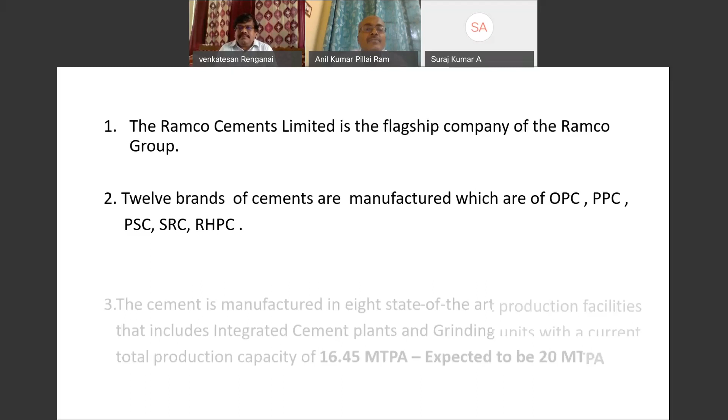What is the grade of concrete? What is the slump required? Which type of chemical admixture is being used, if at all? And how far is the batching plant or the concrete mixing from the place of delivery, so that slump retention and all can be planned. Based on that, different types of cement are there, and our present capacity is 16.5 million tons.

This is expected to be 20 million tons per annum because we have our expansion going on. One plant is coming up in Kurnool district, a greenfield integrated cement plant, and we have a grinding unit coming up again in Odisha. With those expansions, our capacity is going to increase to 20 million tons per annum.

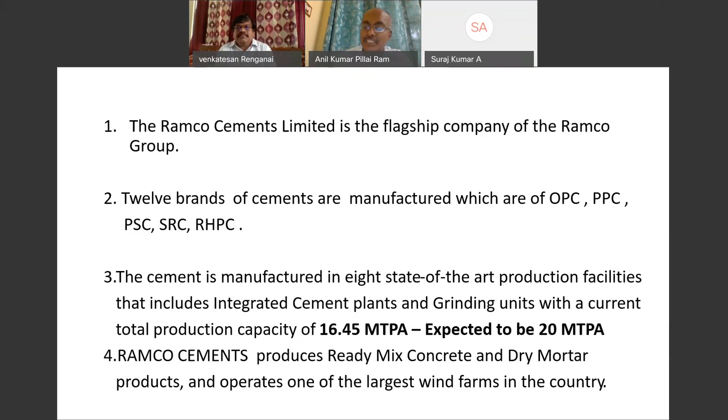Apart from ready mix concrete and dry mortar plant, we also operate one of the largest wind farms in the country, because renewable and non-renewable sources of energy become very important. We need to use more renewable energy, and that is where our initiatives in the area of wind farms play a vital role.

Major projects can go in for that, and we have this Infra 53 grade cement specifically for projects that want a longer slump retention time. So within ordinary Portland cement, we have this degree of customization. We also have a special type of cement, Ramco Super Fast, which is specifically meant for precast applications.

Precast items are being used in huge quantities nowadays in construction work, whether it is a solid block, hollow block, paving block, or for that matter, the superstructure of some infrastructure like bridges, also made using precast. That is where Ramco Superfast cement plays a vital role.

Then we have the most widely used cement across the country, the Portland Pozzolana cement. Various types of Portland Pozzolana cement are there—you have the Ramco Super Grade, which is a PPC, and Ramco Super Crete, which is specifically meant for concreting application.

As all of us know, PPC cement is specifically recommended from the perspective of low heat of hydration, low lime leaching, and higher durability in concrete. Because of those advantages, we have this blended cement, and we have Portland slag cement, which is again as per IS 455, and we have sulfate resisting Portland cement.

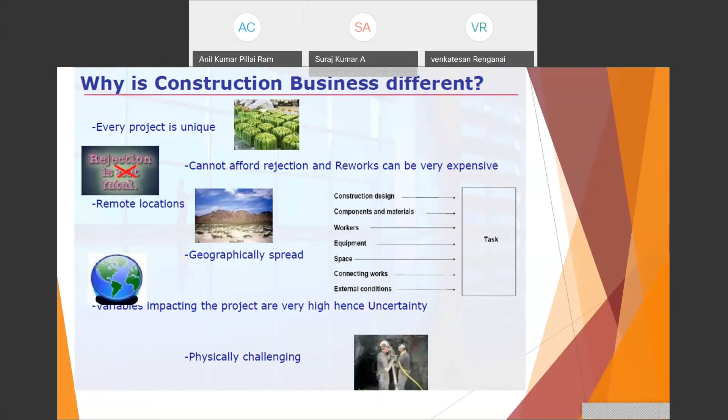As Anil sir told, there is low productivity. Day by day we are seeing in the construction industry the productivity is dwindling, and despite bringing machineries, our construction industry productivity is lower than any other industry. There are a lot of safety issues too, especially when our infrastructure projects are at very high altitude, and even with multi-story buildings nowadays, there are a lot of safety issues.

The most important one we are going to see now is the waste of materials and resources - what are the things that cause the project a lot of problems. Along with that, we see issues with stores management, sub-vendor coordination, and customer interface.

One of the most important things I am seeing here is external factors. Even the introduction of GST, demonetization, and now COVID-19 - everything is bringing a lot of problems to our construction industry.

Now people are suffering like anything, because many times we use migrant labor. Now everybody has gone. Whenever I contact my friends, they tell me getting back the people is very difficult. So now it's time to think how to retain them - what is required to retain our workforce, even our engineers - because we are facing a very big challenge. How do we overcome this is a time for us to think on.

So one of the things I feel personally is lean - let us see how it will help. If you go through some of the details, we can understand how lean is going to help us.

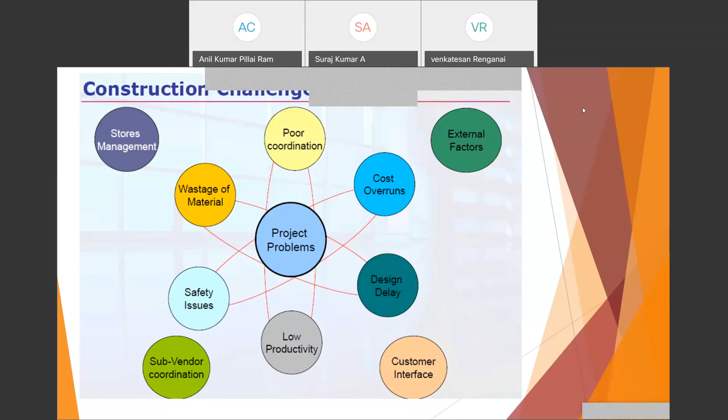Coming to the lean definition, from lean manufacturing or lean production, simply lean is a systematic method for elimination of waste within the manufacturing or production system. We have to identify waste - waste being the non-value adding things. We have to identify them and eliminate them. So it involves improving the production process with minimum cost and maximum value.

What is the advantage of it? By eliminating waste, naturally our cost goes down. On the other side, we have to identify what value is required, considering the customer needs, and based upon that we have to proceed.

Now what we are seeing with our mobile applications and mobile phones - a lot of value additions are happening and the prices are coming down. The same way we see with many products, even take the car - now we see a lot of digital things included there. So value additions are happening everywhere, even including our construction activity.

Coming to lean construction, it's a combination of operational research and practical development in design and construction. It starts from design and covers the entire project life cycle. Construction with the adoption of lean manufacturing will take many things from lean manufacturing principles and practices into the end-to-end design and construction process.

Everywhere we are checking what things we can implement to add value. So we are also trying to minimize cost and maximize value by identifying customer needs through our construction activities and processes.

Unlike manufacturing, construction is a project-based production process. As I already told, it is a unique thing with a different project, so we have to customize every time according to our present project. It is again production where we make various things, but it is based upon the process - we have to identify the processes and improve them.

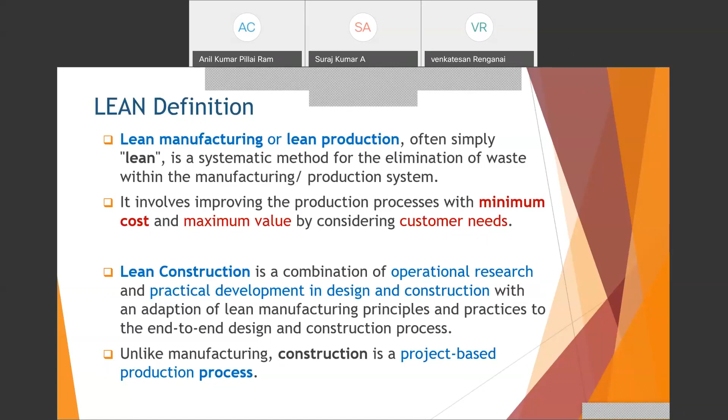So if you see the history of lean, it started in 1890 in Europe. Then subsequently it went to craft production, even making yachts and all. Then later on they went with mass production. Especially Henry Ford, he started the production line, the assembly line concept, in which he started minimizing the time, maximizing the process and all those things.

So parallelly, the Toyota, when they started manufacturing the car, they were in a very big trouble to compete with the US market. So they were thinking how to make it. So Taiichi Ohno, one of the chief engineers with Toyota, as well as the people in Toyota, they started making this Toyota Production System, wherein they started identifying the process and how to improve the process, eliminate the unwanted things in the process, including the just-in-time concept of bringing the material on required time and all like that.

The Toyota Production System, subsequently, when it went to other parts of the world, it slowly got coined into lean thinking, especially with a book called The Machine That Changed the World, written by James Womack as well as Daniel Jones. They brought the concept of lean thinking. So here again, they emphasized how to reduce the waste and all.

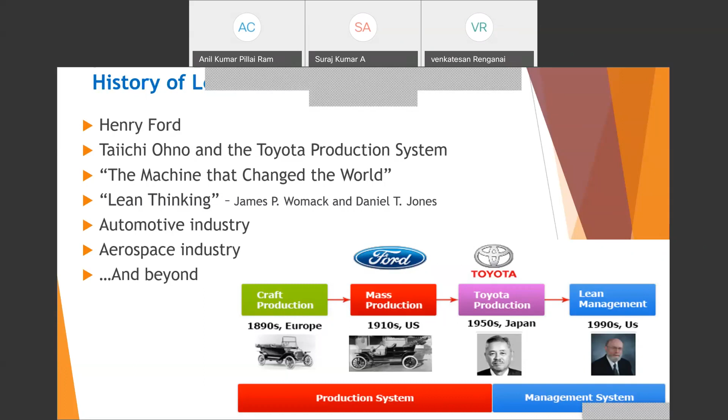Before going further, we will see a very interesting phenomenon. A Construction Industry Institute publication from 2004 conducted a study with application of lean principles in construction that reports 75% to 90% of field work is non-value added. What do you mean by non-value added? It means where we will not get the payment simply. In the non-value added, there are two things: one is non-value added essential, that is required to make.

In our construction industry, if you want to make brickwork, I need to make some formwork and all. That is the non-value added essential. There are many non-value added non-essential things also, like bringing the material, stocking at that place, later shifting that from one place to another. Many things we do are non-value added non-essential. So if you compare the value added with the waste, that is non-value added, in order to do that 5 to 15% value addition, we have to do 85 to 95% of the non-value added, that is waste. So there are various waste things there.

We will be discussing about that a little later, but it's a fact that you can check if you want. Even we checked with some sites, we went and verified. So it is very sad to say, but there are many non-value added things there. There are some essential things there. Now it is time for us to identify the non-essential things, and we have to remove those things, by which it will bring down the cost and increase the efficiency. It will save time and all, because everything involves cost and time.

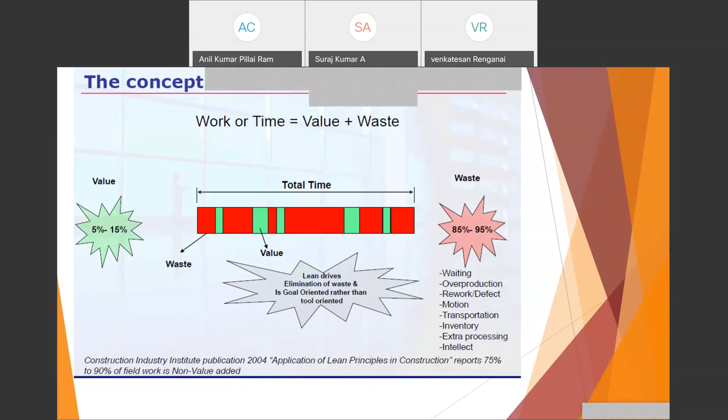So now we have to see the necessity of lean. Competition is there everywhere, worldwide competition has started and it is growing. People are competing. Now Indian industry, many people thought they were very comfortable. Now we are seeing foreign participants coming inside. Similarly, our people are going and taking some foreign contracts. So companies that meet customer needs and are more efficient than their competitors only will survive.

Please understand, now the problem is more than growth, now the problem is survival itself. I think all of you will agree. Today most of the construction companies are in red because they are not in a position to meet customer needs, as well as they are not efficient compared to their competitors. So it is becoming very difficult for them to survive itself. So now it is necessary for them to adopt lean if at all they want to come out of all those things.

See, earlier you can have any color you want as long as it is black. That is what it indirectly means, that customer didn't have choice. It's a dead philosophy.

Initially, when Ford was making cars, they were making only cars with black color only, because black is cheap. So they thought, okay, we will make with black because the customer doesn't have any other choice.

Nowadays, we are seeing not only a change in color. Now we are seeing that a lot of things are brought into it. Many infotainment features were brought inside the cars and all. So we are seeing that everywhere, value addition is becoming the need of the day.

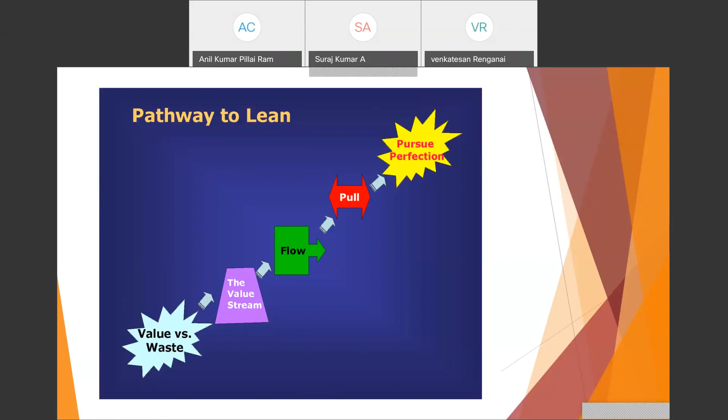We have to specify the value. Here the value can only be defined by the ultimate customer, what the customer wants. Earlier we could make and give something to the customer. Now the customer specifies. Even Mahatma Gandhi told that the customer is God. So we have to understand what is the need of the customer.

Value is only meaningful when expressed in terms of a specific product or service, which meets the customer needs at a specific price at a specific time. Now the price also they want very specific. Some things where they want economy, some things where they want luxury. So the price will vary.

Similarly, with time, people want it very urgently. So we have to go for making it very fast and delivering the things and all. So here, any process that the customer would be prepared to pay for adds value to the product. We have to identify here what the customer requires and is ready to pay for.

Value adding activities transform the product closer to what the customer actually wants. So understanding the customer need and requirement, if you go on adding value, that will make the product closer to what the customer actually wants, and increase customer satisfaction also. So primarily the lean concept emphasizes value, that is nothing but what the customer requires or wants. So we have to identify that one first.

Second important thing is the value stream. So here we have to identify and create that value stream. Value stream is nothing but the sequence of processes from raw material to the customer that create value. Here we have what are the actions currently required to bring the product from raw material into the arms of the customer. So the product will go under various processes.

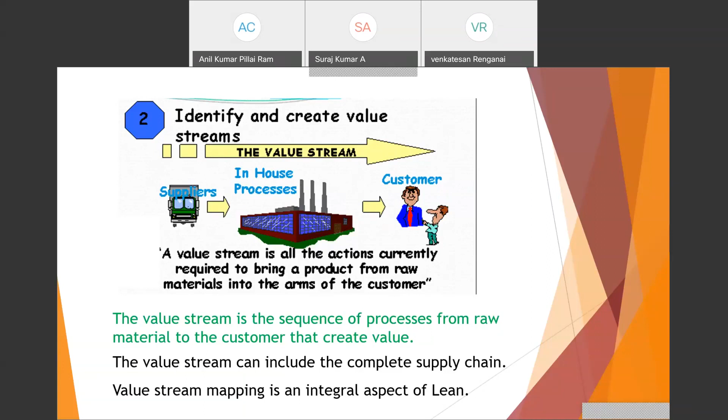The next one is flow. Here we have to make the value flow. The flow is between the processes, we have to identify what are the things that are required. So we have to identify and link all the activities and the process into the most efficient combination to maximize the content while minimizing the waste.

Here we have to understand what products should flow through the lean organization at the rate of the customer needs. We have to identify what is the rate at which they require. So we don't want to bring so many inventory and pile up the inventory as raw material or as finished products. We also have to identify what progress is required and how to combine them, by which we can eliminate many of the non-value adding items.

So here we have to add value more quickly. We have to identify how we will be making the flow by removing the obstacles and all. Later on we are going to see everywhere, when we are processing it, lot of constraints are there. How to identify the constraints and remove those constraints will come part and parcel of this flow concept.

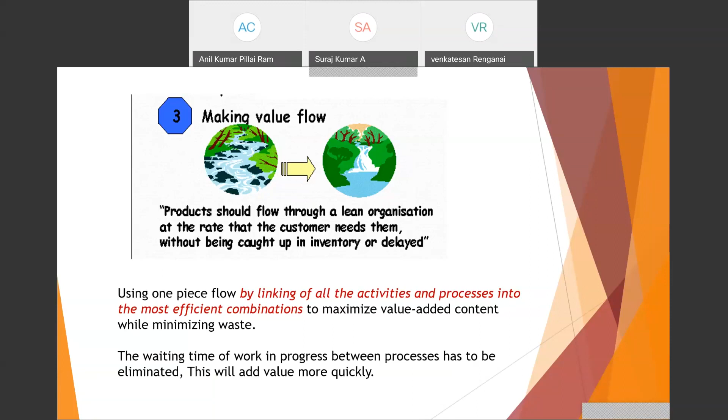The next concept is pull production, not push production. Normally what we are trying to do is we are going from the top down approach. Here we have to emphasize the bottom to top approach, that is the pull approach. The pull production means, whatever the customer's demand, accordingly we have to release the thing.

The customer has to pull the things from the various production people. Here we have to make the thing as required, pull the value according to the customer's demand. We have to identify what is the customer demand, and based upon that, we have to release the things. So we have to respond to the customer's rate of demand, the actual customer demand that derives the supply chain, so the entire supply chain we have to link according to the customer demand.

Based upon the supply chain view from downstream to upstream activities, we should not process the upstream supplier until the downstream customer signals a need. Even in our construction also, we see a lot of things are manufactured, that means we are producing, and a lot of things become oversupply, more than the demand, and we see a fall of the market. It may be flats, big cities and all. So every time we are going for push production rather than pull production.

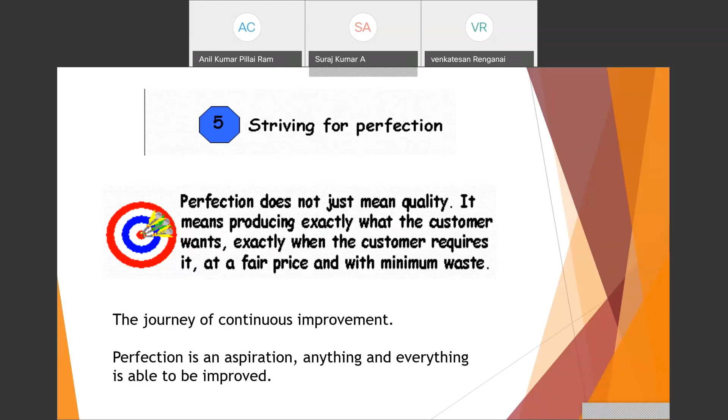For example, if I am doing brickwork, I can take the measurement and get the payment for that. At the same time, there are many activities involved in making this value-added activity happen that we cannot avoid, but we have to reduce it.

In lean, they explain this under Muda. It is a Japanese word for waste. There are 7 ways mainly they are identified, and it is very much relevant to us also.

Number 1 is overproduction. Here, whatever is required, more than the demand, we will be going on making it. Even at the site, you can see a fellow making some rings and all.

He doesn't know how much is required. Whatever is available, he will take and make the rings. And majority of the time, we will be seeing many things lying there unnecessarily. With overproduction, we have to be very much particular.

We have to make it properly, whatever is required, by which we can avoid excessive inventory and overproduction issues. The next one is coming to inventory.

It may be inventory, raw material, as well as finished goods. We have to get the right thing at the right point of time, just as required.

So what is the problem? If majority of the time we will be seeing what is required will not be there, and what is not required will be there, which will not have any value addition. So that will be lying there without any value addition.

So we have to identify what is required. With keeping inventory, we have to keep a space for it. It will be obstructing our movement of people and all, and also it will require money for safeguarding that, preventing pilferage and all those things.

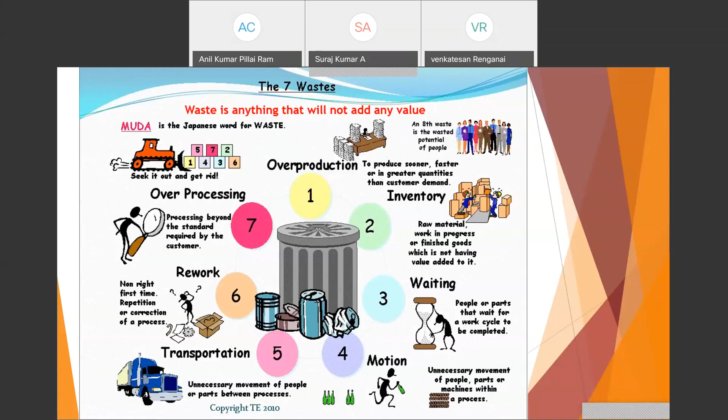For these, various tools are there, and I am bringing some of them. There are numerous tools available. The major and very simple one is the 5S system, which we will see in detail. I will explain it, and we can see a small case study where we did 5S clubbed with another tool. The next one is the Last Planner System, which again we will see in detail, and I will explain a little bit of the software associated with the Last Planner System. Then the Just-In-Time system.

Of course, the case study involves just-in-time as well. Especially when you require the main material, you have to understand what your ordering time will be to get the material back. You have to identify that lead time, and identify the long lead item first since ordering it will take more time to process before you get it. So you check everything according to the progress of work and your schedule, considering the lead time, and make your procurement of material accordingly.

The next one is value stream mapping. As I told you, at various points in time, depending upon the workflow, you map those things and help people understand how to proceed with the work.

Then the next one is Kanban. This is like a pull system, where you understand the downstream customer's needs, and everything is arranged in that way.

And the next one is Kaizen. Here people go for continuous improvement through brainstorming techniques. A Kaizen event will be conducted, where people are called and asked to undergo some brainstorming.

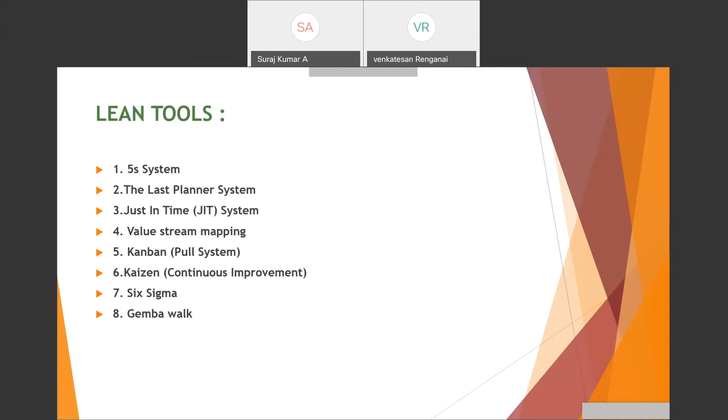Okay, so here first we see the 5S in detail. The 5 phases of the technique are: sort, set in order, shine, standardize, and sustain. In Japanese, it is called Seiri, Seiton, Seiso, Seiketsu, and Shitsuke.

The Japanese are very fond of it, and wherever you go you can see them following it. In fact, recently in January I had been to Tokyo and some other cities in Japan. Wherever we went in construction, they were following it meticulously, ensuring all these 5 things are present 100% at all the sites.

Many times you cannot see that construction activity happened at a place. Even at public places like roads, they do work only at night - they come and do it, and in the morning you cannot tell work happened overnight. Everything is cleared away and they go back. No traffic is blocked except during night time; they reroute it to handle public amenities. Even at construction sites, they take care of the surroundings and do everything properly. So it has become part and parcel of the system.

But for us, we can easily understand these things and how we can do it. Of course the first one is sorting - here we have to identify what things are in doubt, which we feel are not required when needed. Depending on that, we can move things out or keep them accordingly.

Once you sort it, then you can set them in order - whatever way you require, you have to keep a place for everything to create a workflow. According to your workflow, you set the things so it makes your workflow easier to happen.

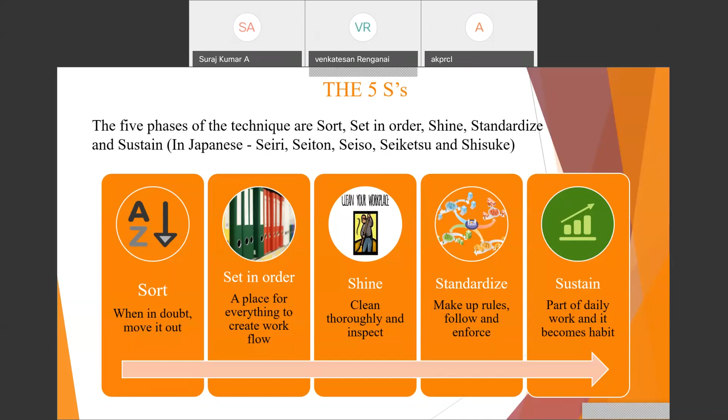For example, we may not require something at our site, but some other site it is required. Please better move those things to some other site, by which we can keep our site free from these materials.

Then there's no value, but it's costly to dispose - that will not have any value, and also it will be very costly to dispose of. Then we have to identify the least costly way to dispose of it. That means we will be segregating and keeping it at one place, and identifying some trucks to come and take those things and move them away from our site, workplace, and all those things.

Here we have to identify whatever is not required, we can put a red flag on it, and we can action it and remove it.

Then the things we have to see are the necessary items - these items may be right now in use or are likely to be used. Here we have to identify what is the frequency - whether we require it frequently, that is daily or weekly use, or occasionally used, maybe one or two times per month, like some of our testing things, or rarely used, maybe during inspection times or sometime only we are going to use it.

So we have to identify those items, label them, and keep them in such a way.

So how will we be keeping it? We can see this with simplifying. Here what we try to do is find a place for everything, and everything in its place. We have to clean and keep it ready to use.

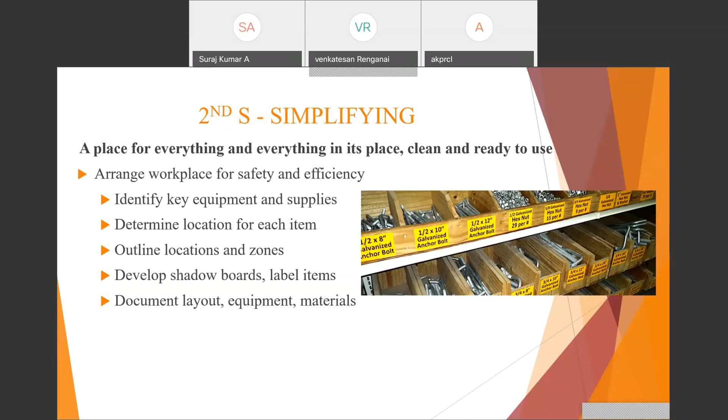Then the third is, as already we have seen, systematic cleaning or shining. Normally cleaning will be done for inspection, especially your construction site. When there is a chief inspection, we have seen many times our entire site gets cleaned. It is not only for inspection, it is also for our normal routine.

People should identify the points to check for performance, because once you make it properly, it will give enough space for the people to perform, and also it will prevent accidents. We have to determine the visual indicators and controls by which people will understand what things they have to make and keep ready.

Mark equipment and control. What are the things, how you have to clean that thing and what way you have to make it, everything has to be made and brought within control, by which people will understand these things they have to do before leaving. The next fellow will come and he will be in a process to do that properly.

Also conduct daily cleaning, housekeeping. Please understand, housekeeping may add some money, but it will save you a lot because it will improve productivity. We have done enormous study on this, and we can see a lot of savings have happened.

There can even be an inspection, where people can go and watch what things have been done. There will be charts, checklists, and they will be going on taking those things. So we have to keep things properly, that will help us.

Now, in this pandemic time, we have been insisting to keep everything clean, even we have to wash our hands and keep everything clean. Whereas now we can see many of the places have made it part and parcel of their system.

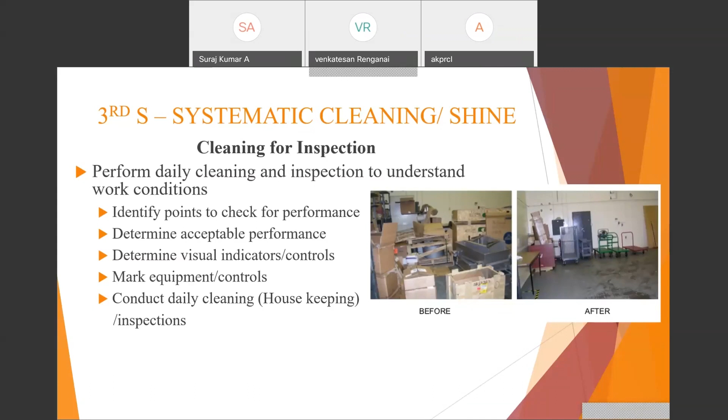Then the fourth S is standardizing things. Here we have to develop a common method for consistency. Please understand, once you make all the three things, you can come to know what are the things that you need to do repetitively.

You can document it, by which the further people need not work on this, they can go for it. There can be standard operating procedures and all. So your fourth thing becomes standardizing.

The fifth thing is sustaining. We have to hold this thing for gains and improving. You can understand by doing this thing what are the benefits, so you can continue with those things.

Every time we can make it a perform routine check and include it in your checklist and all those things. We also have to analyze the results, what benefits we are getting. You can show it to your client, you can show it to your subcontractor, and you can insist your subcontractor also follow that thing.

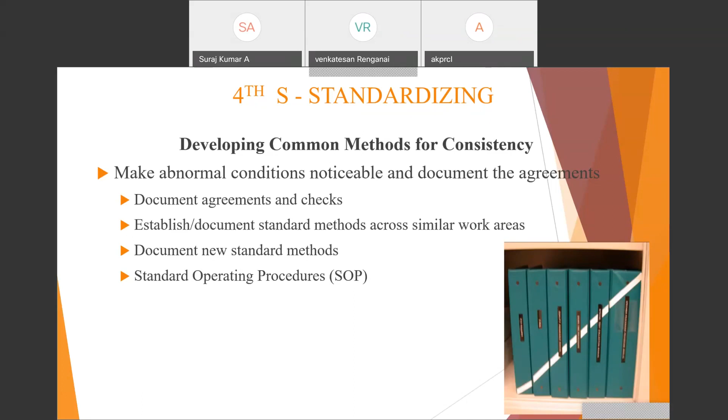So we have to measure the progress and plan for continuous improvement by motivating all the participants, not only the client, but also your suppliers and subcontractors and everybody, so that they will also follow. Ultimately you can see a lot of benefit. Even they will get much productivity, which gives a lot of benefit to them also.

Here is one case study we have done where we used the 5S along with just in time. So we have done a reduction of material waste.

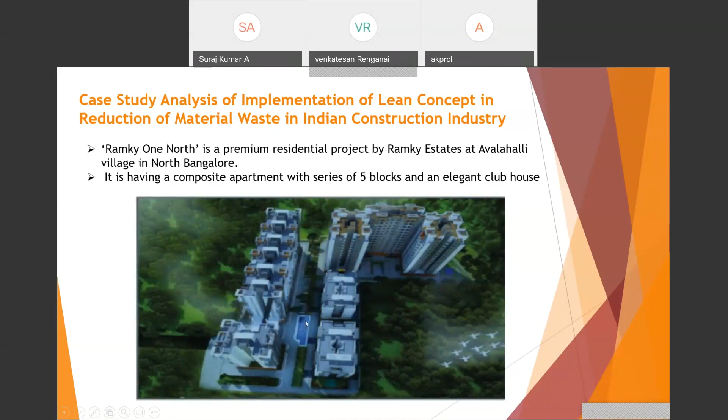This is Ramky One North, a premium residential project by Ramky Estates at Avalahalli, a village in North Bangalore. It has a composite apartment with a series of 5 blocks and an elegant clubhouse. You can see these 5 towers, and there is a clubhouse, and at the bottom some of the things are interconnected also.

Of course, I am going to show you the results only. A lot of activities we have done, but due to the paucity of time, I am going to show the results.

Now we can see the reconciliation statement for the month of June 2017, before application of the 5S rules. We studied cement, steel, river sand, as well as M sand, and took the reconciliation quantities. We identified the actual consumption, the theoretical consumption, and the difference, which shows the waste. So we identified the percentage and how much excess waste amount has come. We could see there is nearly 93-94 lakh as the excess amount that has come due to this waste.

After 2 months, we insisted they apply 5S as well as just in time. Then we measured it in the month of August. We could see, with respect to the quantity, what the things were, and identified the percentage. With reference to the percentage, what excess waste had happened. So that brought it down to 45 lakhs.

This is table 5. Here you can see a comparison between the two periods, one is June, another is August. So what is the difference? Percentage of actual consumption versus theoretical consumption, we got that. Based upon that difference, we identified these materials.

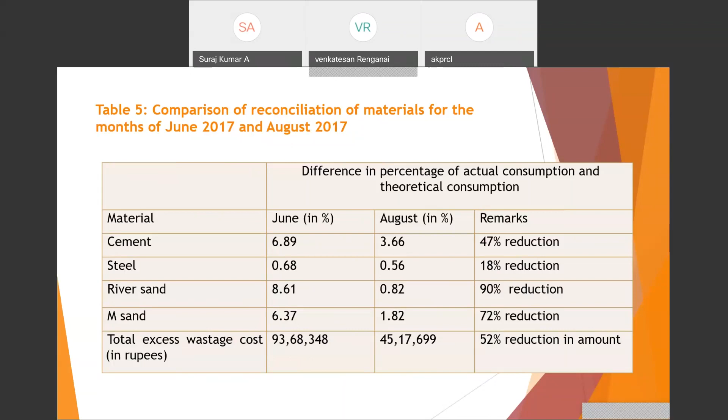Now I will run very fast through the last planner and the rest of the things, because it is getting late. The last planner system is very interesting, so I'll try to concise it. The current planning system has a lot of problems. Things are made at the head office, and we are working in corrective mode, meaning we are very much reactive rather than proactive.

There is no collaboration between the various stakeholders at the site level. The main thing is we are not involving the frontline people, the people who are working at the site. It's all made by the head office, by the people sitting in the office, by which there is no ownership. Ultimately, the project gets delayed and we fail to complete things despite a lot of planning.

As already said, we are not monitoring the effect of workflow variations. Also, we are optimizing the performance without understanding what is actually required. People stay within their own turf and don't understand the requirements of other people.

There is very little learning, and a lot of repetitive failures. With lean philosophy, we can change all these things through flow management, value management, and activity management.

With the last planner, optimistic planning is replaced with realistic planning. The traditional push system scheduling was replaced with pull system scheduling. It improves communication and reliability, so we can create trust and collaboration. This is very much important.

Please understand, right now people have no trust. They suspect each other, and there is no proper collaboration. The last planner system will help them achieve proper collaboration.

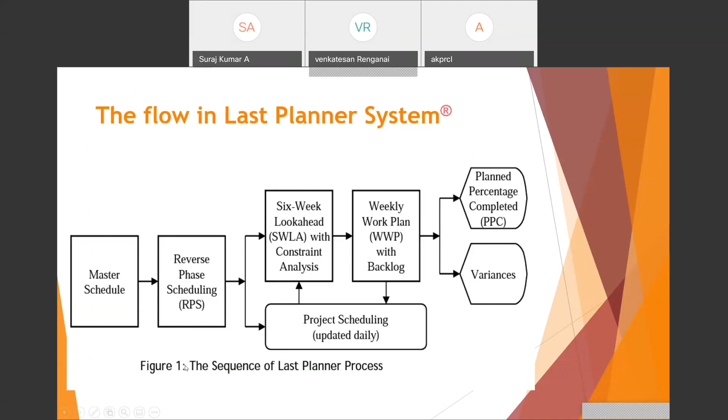Now what we try to do is take the master plan and convert it into phase scheduling. We split it according to milestone activities, and we do reverse scheduling, going back from where we want to complete it, so you can know when we will be completing it.

Then this comes down into a look-ahead plan. The look-ahead plan is nothing but 3 weeks or 6 weeks, depending upon the progress of the work. Then ultimately it gets brought down to a 1 week plan.

In the look-ahead plan, we identify when we will be removing constraints, moving items to the constraint-free basket, so the people at the site can do the work without any problem. If any problem comes up, we identify the root cause and remove it.

These are the various schedules you are seeing: the master schedule, then the phase schedule, then the look-ahead schedule and the weekly plan. Even the weekly plan will be converted into a daily plan for the people to carry out.

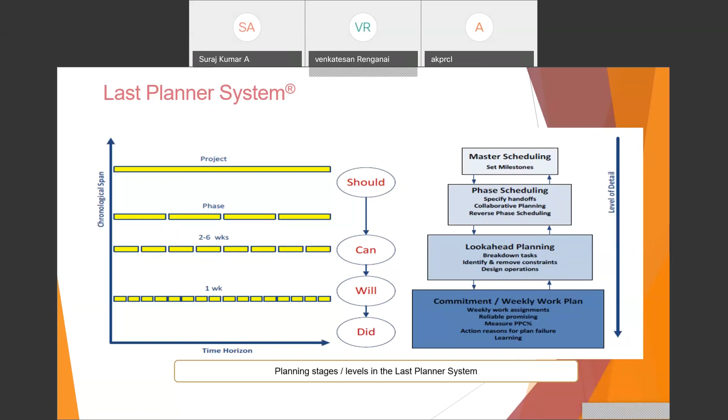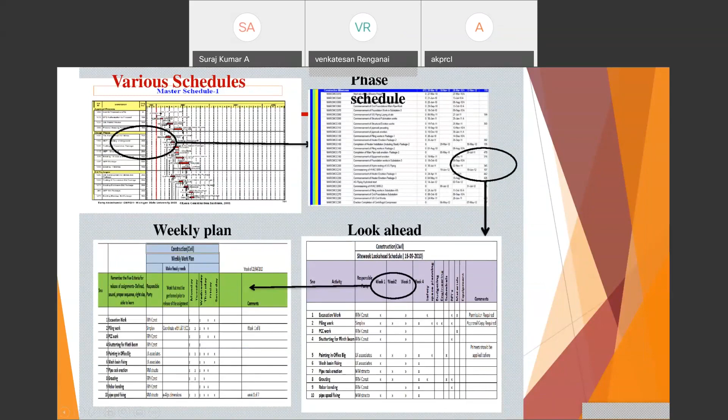Of course, various software are available. The one we teach here at NICMAR is Lean Plando. It has information flow and team involvement. As I told you, the software is used by everyone, including project managers, the planning team, even the people from the site team and the coordinating staff.

The initial inputs are given by the project manager and planning team. Updates are made by the site people, even using their mobile phones. That is the interesting aspect.

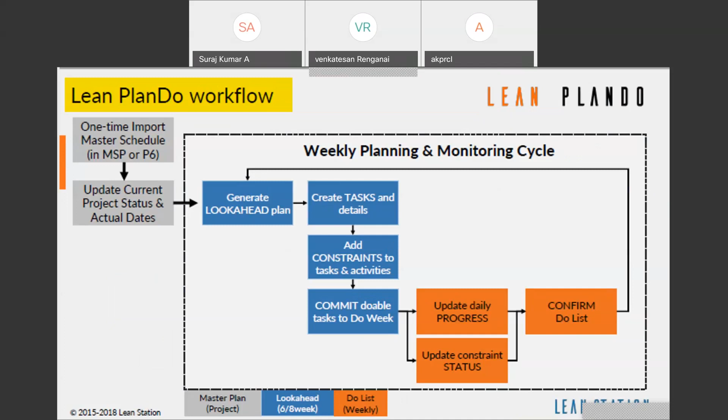Here constraints will be identified and removed, and daily progress will be measured. Any shortfall will be immediately communicated, identifying what problems need to be addressed. So in one window you can see the current work going on and the subsequent look-ahead window showing what things have to be carried out.

Also, you can see that activities will be split into various tasks. And the tasks will also be assigned ownership, who has to own what, so there will not be any blame game.

They know who has to do what, and they will give the resource that is required, and whether it is ready. Once the constraint is removed, it will come up green. When the constraint is identified, approvals have to be made, and responsibility is fixed on who has to do the approval. Once it is cleared by them, it will be removed. So like that, everybody can track who has to do what from here.

Others also will understand. There are so many things there, I've just given a glimpse of it. Later on, if you want, you can go to this site and see what things are there. There are tutorials available.